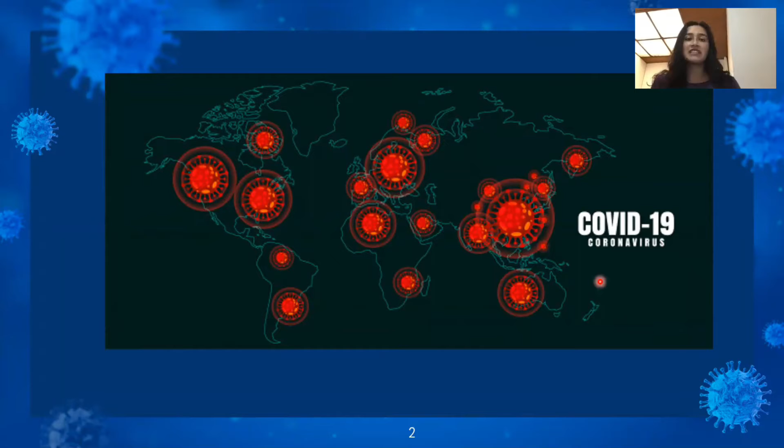The world is suffering from a sanitary emergency due to the COVID-19 virus. The efforts of the laboratory work around the world have resulted in the fabrication and distribution of vaccines that promise to give a solution to a problem. Colombia has not been unrelated to a problem. Consequently, the government has agreed on buying different types of vaccines to give front to a problematic, searching the herd

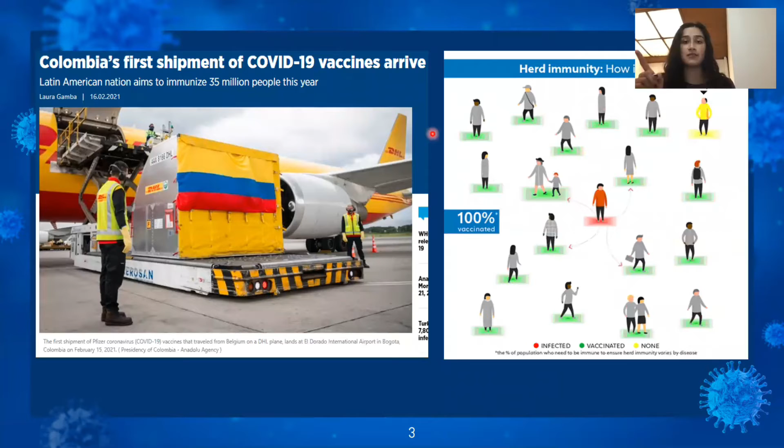immunity. The National Vaccine Plan has been designed to create a logistical chain to take the vaccines from the laboratories at ultra-low temperature, -20 Celsius, to 7 principal cities, where they will be stored temporarily while they are distributed in the municipalities. Given the high cost it takes to maintain the ultra-low temperature, the transport of the vials won't be at this temperature. It will be at a range of 2 to 8 Celsius degrees.

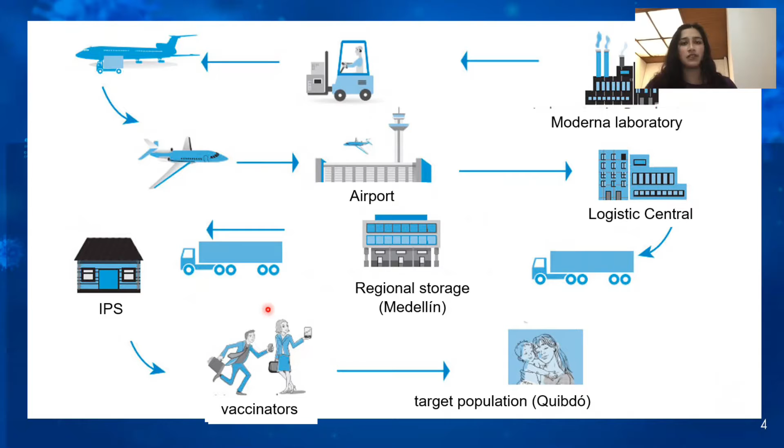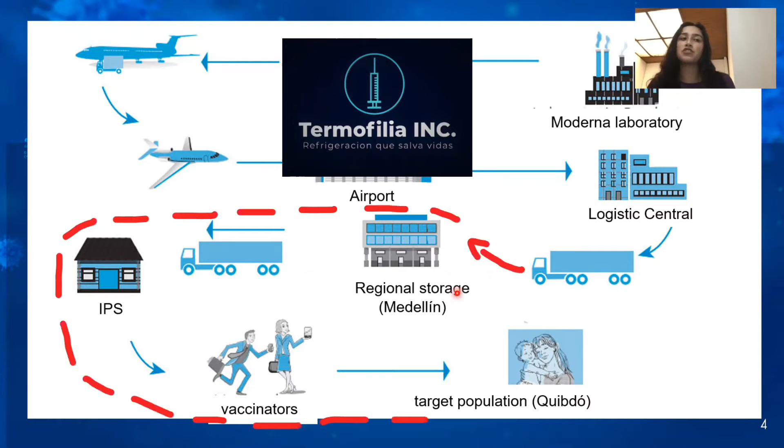We are Termofilia Inc., a company created to design and manufacture the transportation devices for COVID-19 vaccines. We have assumed the challenge of transportation of the vials to Quibdó, Chocó, from the central city of Medellin at a constant temperature of 2 to 8 Celsius.

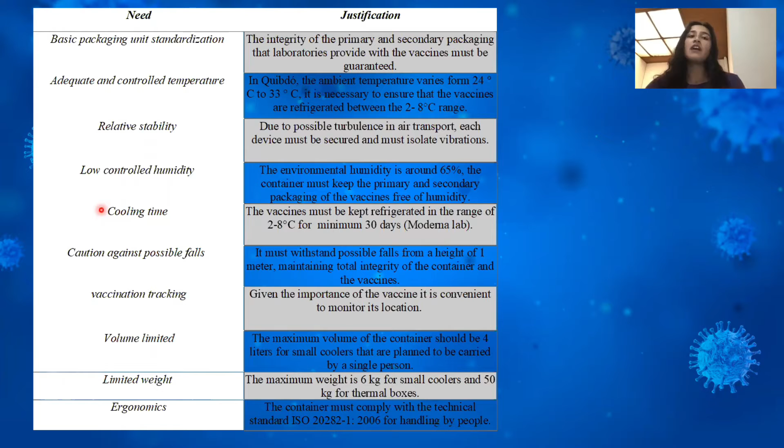After a harsh investigation, Termofilia identified the needs of the movement of vaccines as the following chart describes. It is important to clarify that these necessities have been identified using the following assumptions. 1. It will be transporting the Moderna COVID-19 vaccine. 2. It will travel by air. And 3. The device will be exposed to an average temperature and weather of Quibdó.

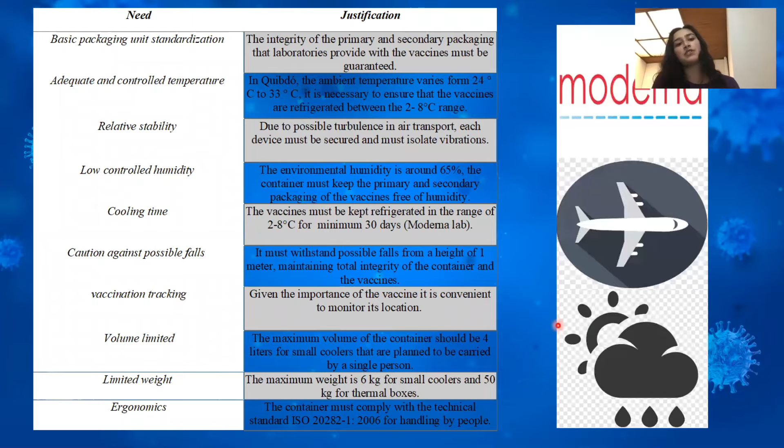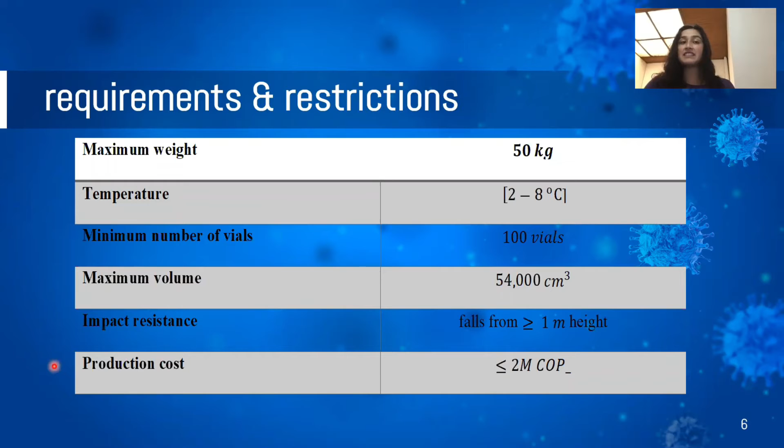The previous chosen necessities were used to partially define the restrictions and requirements the design must accomplish. With the first requirement as the beginning point, Termofilia designed 4 alternatives for the solution, from where it was selected the most convenient to develop in the incoming stages of the project. The steps for the evaluation and selection of the alternative are shown next.

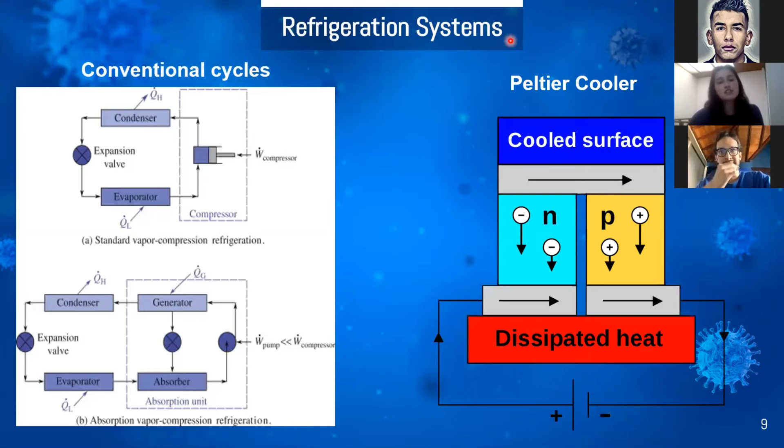First, we investigated the existing solutions, as you can see. Next, we investigated different refrigerating systems, like conventional cycles, Peltier cooler, Einstein refrigerator, conventional cooler packs. Termofilia team was divided into couples to hear and work on different design ideas. The first prototypes were quite simple, as you can see in the following sketches.

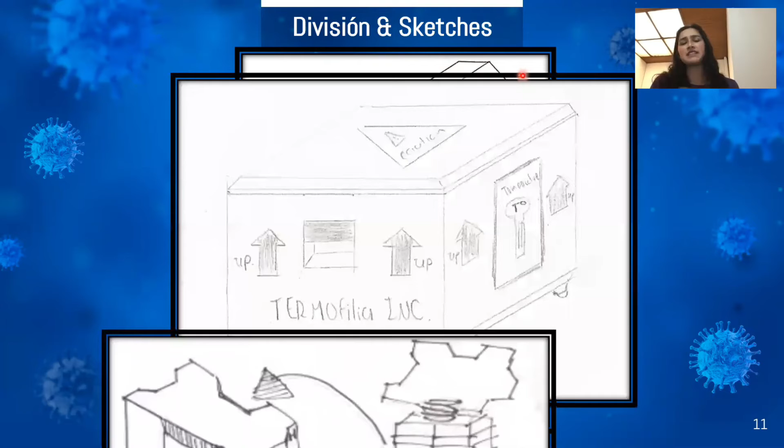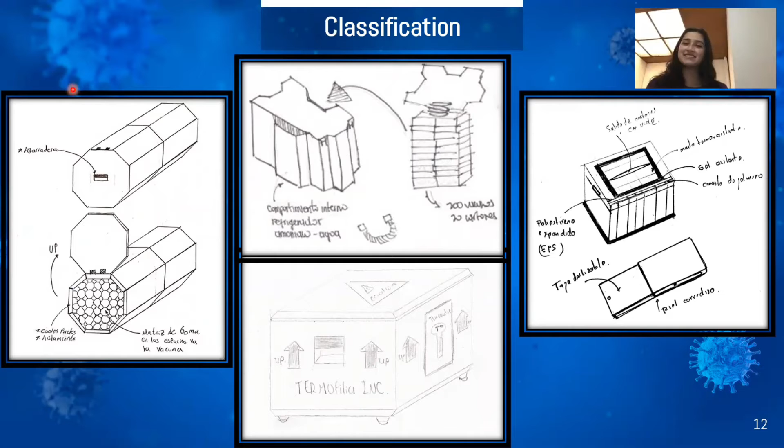There was a first filter from the design concepts in which 4 of the 6 present were chosen. Subsequently, there was a more detailed progress in the design concepts. In order to expand the information from each concept, there was a provisional data sheet with the main characteristics of each one. And after that, there was a disclosure with each member of Termofilia Inc.

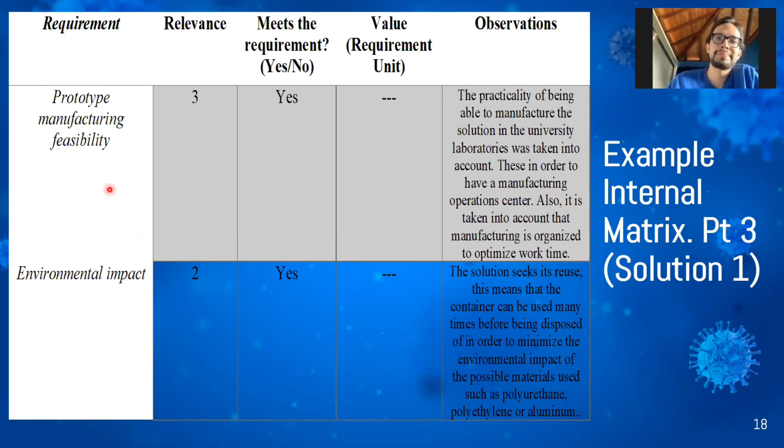In the latest steps of the progress, there was established a rating method in which an internal matrix grades each fulfillment of the requirements. Finally, the information from the previous rating was shared and exposed with arguments and relevant details of the solution concepts in order to depict a better rating with more information in the final decision matrix.

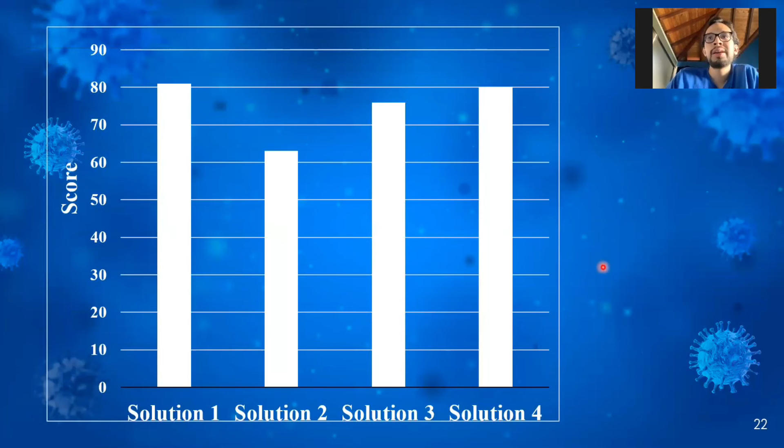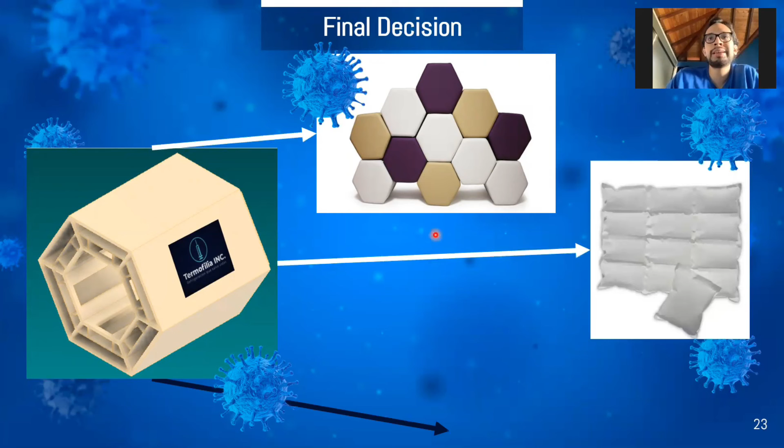From the last one, the most relevant conclusion was that the concept from the solution 1, which has the following characteristics, was the best one. Its container has a hexagonal geometry, its cooling method is through cooler packs. The minimum unit of the bundling of vaccines is a cage with 10 of them. It improved the attachment with other containers.

As part of the selection process, there were 2 subsystems that made part of the whole container. With this label, Termofilia Inc. divided the company into 2 parts. The first one that will work on subsystem 1, geometry and structure, and the second one that will work on thermal isolation and temperature supervision.

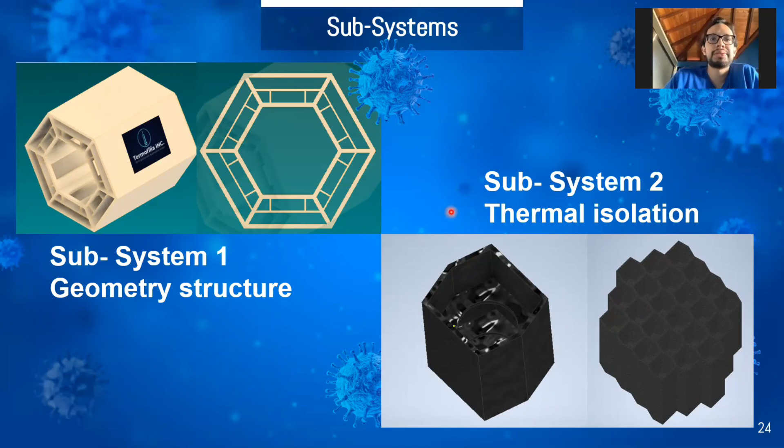Termofilia Inc. along the Sprint 1 has compiled, classified, and assigned information that will allow the identification of the problem, transport of COVID-19 vaccines in Colombia, to be solved in a satisfactory and productive way due to the restrictions and the solution design concept for the next sprint.

And for the last part, Termofilia Inc. made a list with the objectives for the next sprint. Polish the design requirements, specify and measure the materials, define the sealing part of the container, reduce production costs, and make a more elaborate prototype and simulate the variables.